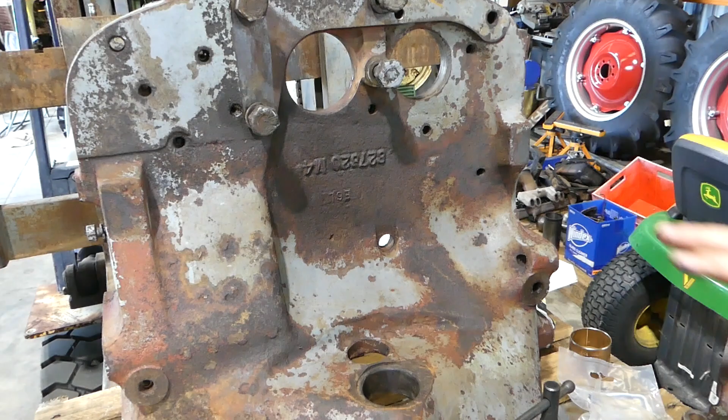Okay, this is the front bolster that the front axle pivots on, where I've got it clamped down to the pallet here with these clamps. That's where it would bolt to the engine. And this back bush here, I've just slid that out, and I could actually see this piece here sitting out the back, looking at the harmonic balancer of the front pulley on the engine.

Now it's got a heap of holes around it and an oil groove around the back there. Or grease groove, or grease track I should say. Never been greased in its life probably. Now everything on this tractor so far, the kingpins, the tie rod ends, everything has come to a standard tractor. So I thought, well, that's fair enough, I'll order the standard bush. But when you order the standard bush, the S42216, it just drops in there like anything. So we know this tractor has had a bit of a hard life up here.

On this housing here, you can see the bush is out of here. I've just taken that out, and you can see where it's been ground here to do some work in the past. I'm not sure what. Now, the front pivot, it had this bush here in it, and if you can see around there, it's actually worn through any brass bush material into the steel backing, but wearing into the steel backing, it hasn't made this hole out of round at all.

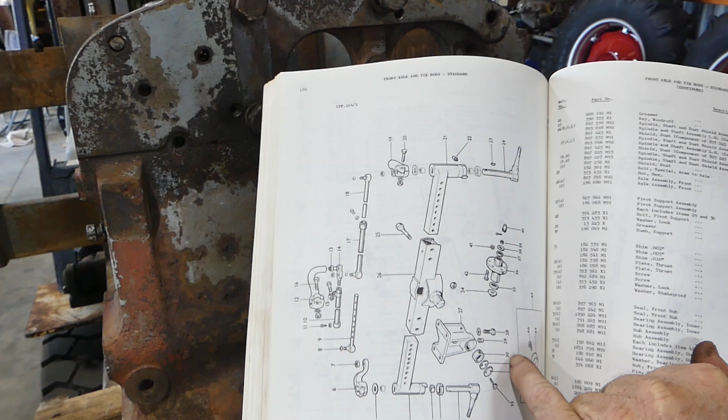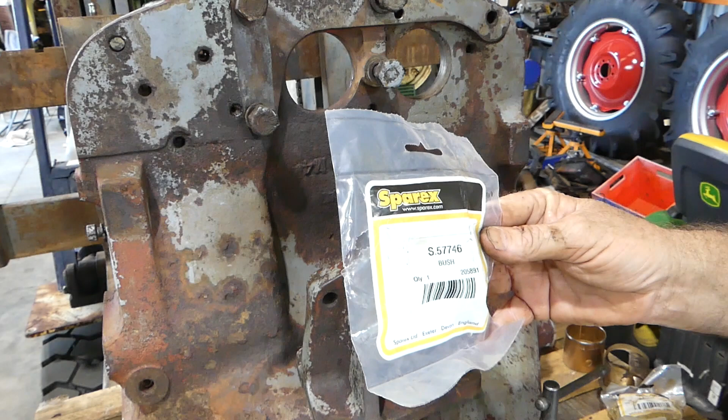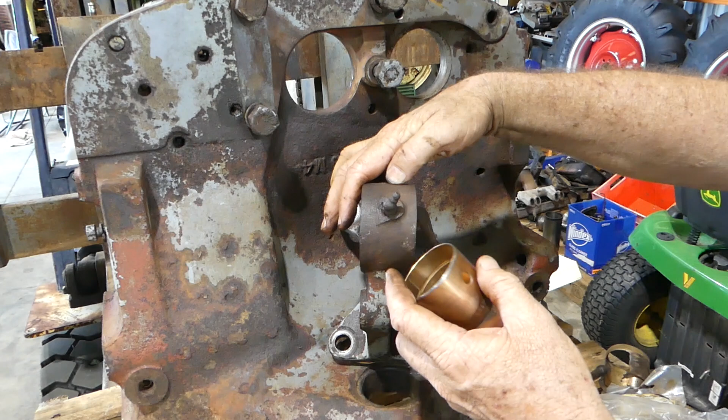So when we look at the Fergie parts book for this bush number 30, and we run across, it's a 196049M1, and that's it. There's no other option for that. So that turns out to be a Sparex S57746. So this is the S57746 bush, and when we look at this, it actually has a grease hole in it, and when you look at the housing here, the grease hole is offset slightly. But anyway, I'll work it out, and even if we've got to drill a new one because this has been ground back, I just don't know how that's going to affect things.

The bush at the moment is perhaps 3 mil longer than the housing, so whenever they did this work here where they've ground all this off, they've probably buggered it up then. I suppose the sensible thing would be to start at this front section. I think that's original. It doesn't look like it's ground or anything. So I'll emery tape in here, make sure it's nice and clean. I'll fit that bush, and I'll probably leave it sticking out the back here a little bit, and later on we'll just see how that affects it.

Now on the front axle, when we pulled it off, you may remember it had a spacer built for here, so I don't know how that works yet. So I think that one's okay. With this back hole though, you can see it's worn through the bush, so we need to actually work out, is the hole round, and if it's not round, is it close enough for us to have a bit of a farmer fix? So I've got my digital verniers here with a cracked screen. I don't even know how that happened.

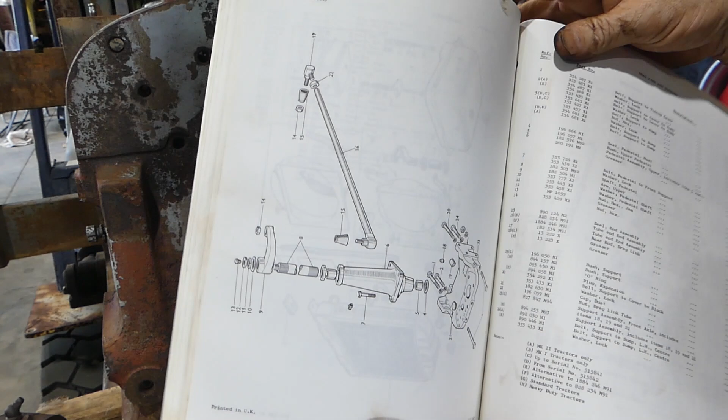Now, so when we find the parts book here and we look at this back bush, which is number 19, and we come across to number 19, there's a G and a H. 196050, which is a G, which is standard duty tractors, which is what I ordered, which I thought I had, or a H, 894152M2. H is heavy duty tractors. So

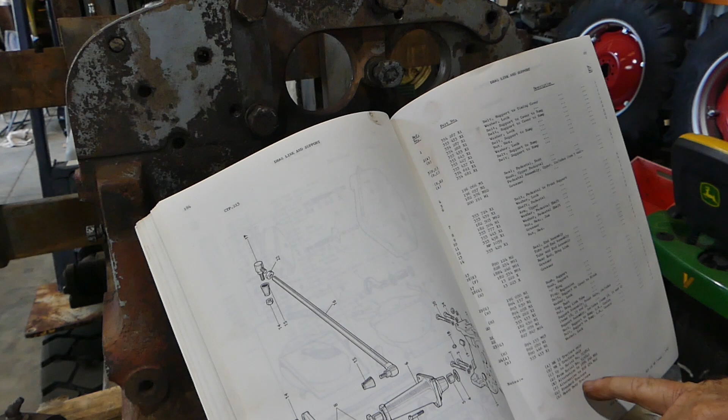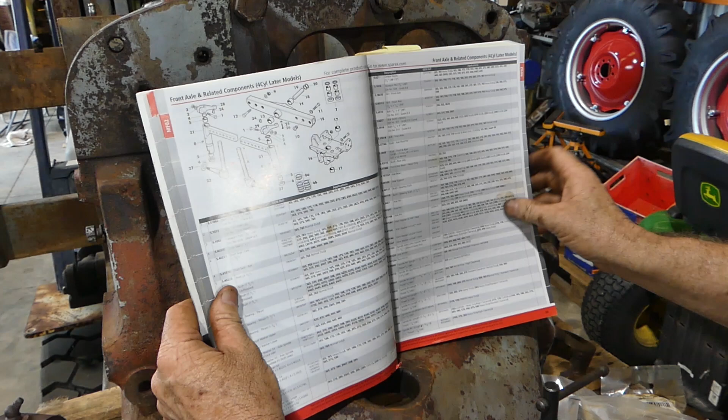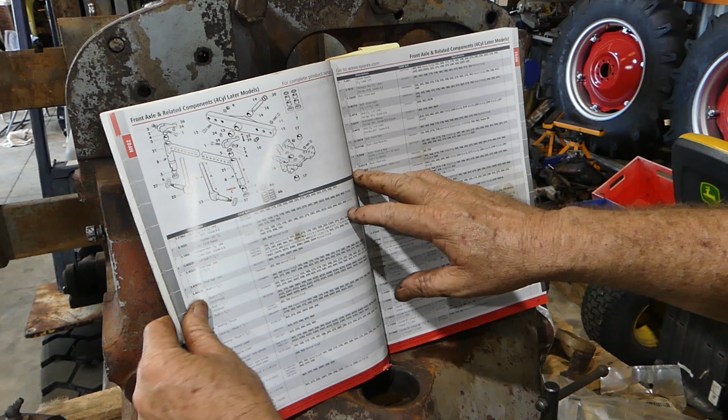when we go to the Sparex catalogue for that particular bush, we have to use number 14 up here, and it's on page 38 of the book. Number 14, so it says 65 front and rear bush is an S3408 or S42208, 196050M2.

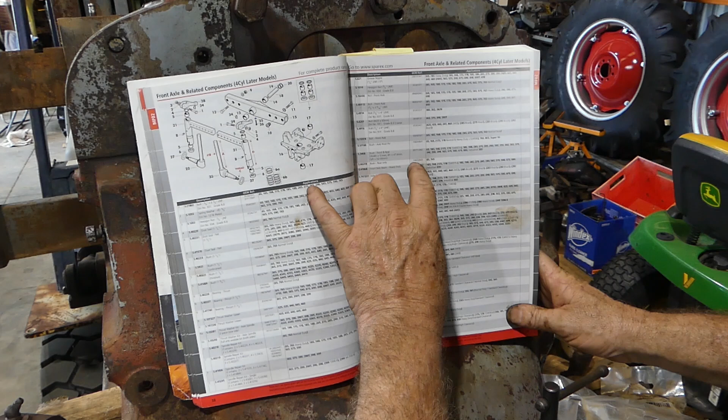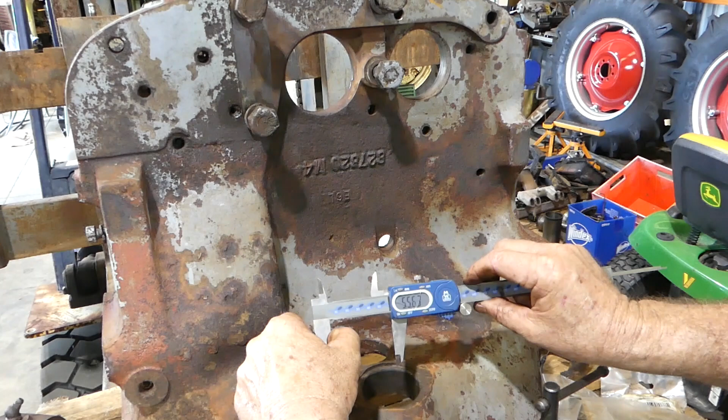Now, when I look at that bush, you end up with all these bloody books everywhere. I usually have them on the bench, but I thought I'd just show you today.

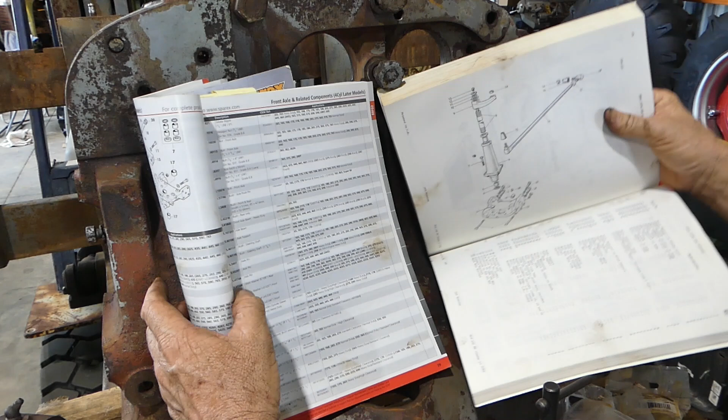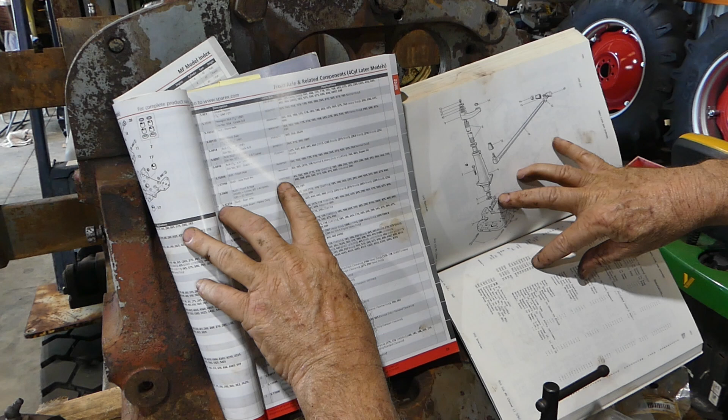So with number 19, the standard bush at number 19, 196050, S42218. So I've got the standard bush because I thought I had a standard tractor. But when we go to H, 897712, that doesn't match up with this number either. So in the parts book it says 65, 165, 168, and this bottom one says 65.

So I may need to make a bush to go into this hole, which is no worries, I've got a lathe to do that. But what I'll have to look at now is the front axle, and just see what my pin size is. Now I'm pretty sure this front pin will be okay, but this back pin, I have to have a look and see if it's had any work on it. Is it out of round? I know it's out of round. I can just see it looking at it.

And I may have to take all this into an engineering works that can bore this out to take a standard bush and can work with the pin. So yeah, that's what we're up to with this section, but we have plenty of other work to go on to with the tractor. With this here, you need to get these jobs organised and get them into people if you need to do that.

So yeah, I might try and get the axle sitting on the back of the forklift there, behind this if I can, or maybe in front of it, and I'll measure the pins and we'll see what that tells us. Okay, I've gone and got the front axle. This is it here. Now this is the front. So when that sits in the tractor, this actually sits like that with the bush inside.

And if you remember when we pulled it apart, there's some shims here, and you adjust it up with the shims, and this plate here bolts on to take any end movement out, which is fine, that's a good thing. So we can work with that. That washer there, there's quite a step in that. So I can probably flatten that off again, that's no worries. And these shims, we don't know what we're going to need.

But from where they've ground the back off on the front here, I presume they've made a spacer washer, and you can see where the spacer washer sits there. So I think they've taken something off here and they've made this washer to build it up. So with the bush that goes in this housing here, it goes on this front pin, and we can see that's quite sloppy there. So I'll just have a look at the pin. We'll go on. Okay, so 50.42 wide.

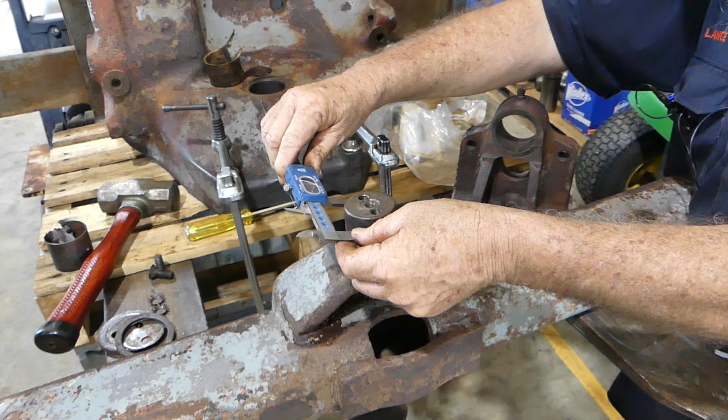49.7, 50.5. Look, that's not too bad. Possibly when this bush presses in the housing there, some of that will disappear. Yeah, I'll have to fit it and see. I'm just not sure with that.

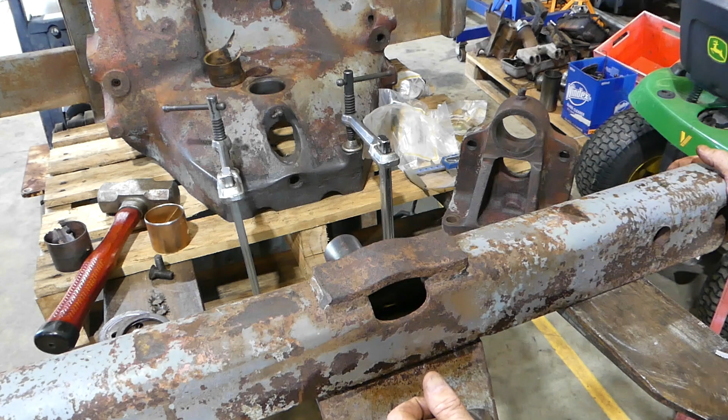Now, when we roll the axle over, so this would have been the worn patch. Actually, you can feel, I think, yeah, where that thick washer was sitting, you can actually feel a little lip there. So I don't have a workshop manual for this tractor, and I'm hunting for one, but I just haven't got one yet to get some of the specs.

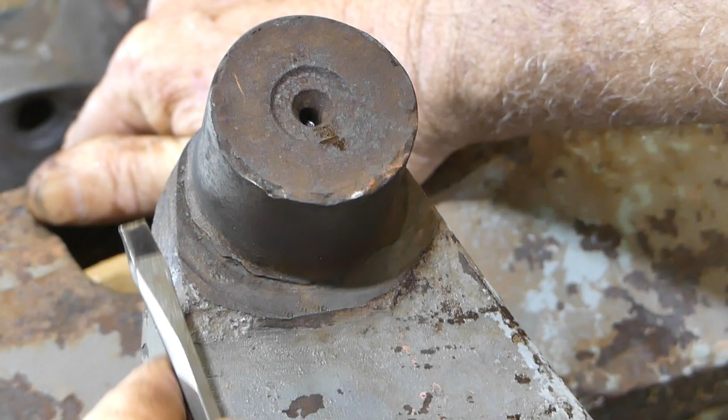Now what can you see? I'll try and hold it and zoom you in all at the same time. So you can see around the edge here, you can see welds. So at some stage in its life, I'll zoom in there better if I can. Yeah, that's a bit better, isn't it? You can see where at some stage in its life they've welded this pin up and obviously machined it back down again. So we have to deal with this somehow. I'll get you back out there again.

So now that pin looks to be part of the casting here, but at the very least we have to get that round somehow. That's where the bush was sitting there. So you can see the wear mark from there to there. So I need to get this round.

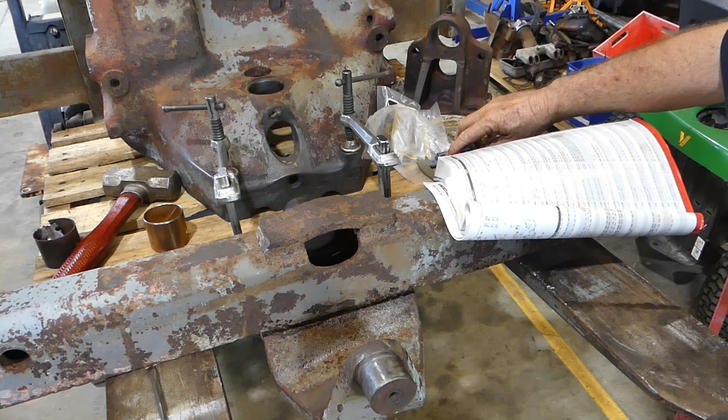Now in the Sparex book, it tells me that the ID is 47.6, and there's no way we're anywhere near 47.6, like we're 48.9. So I think what's happened is this has worn out sometime. They've bored this out, they've made a bigger bush, then they've welded the pin up here and they've set this up in the milling machine and they've brought this back down to size. So there you go. I don't know what I'm going to do here just yet.